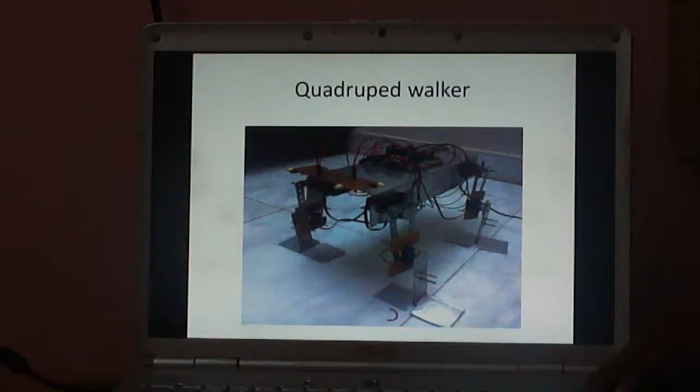So I learned from those basics and moved on to my own project: a quadruped walker. It has 4 legs, and each leg contains 2 servo motors.

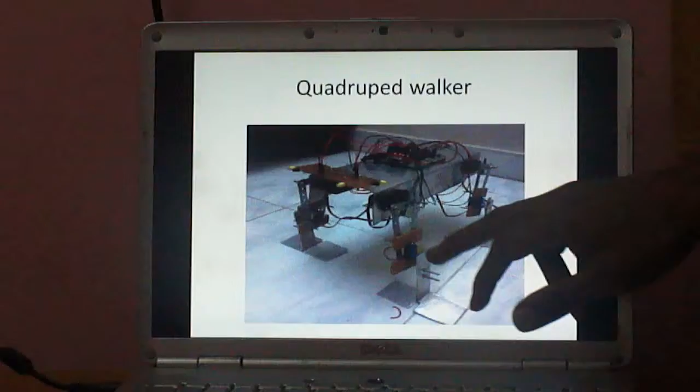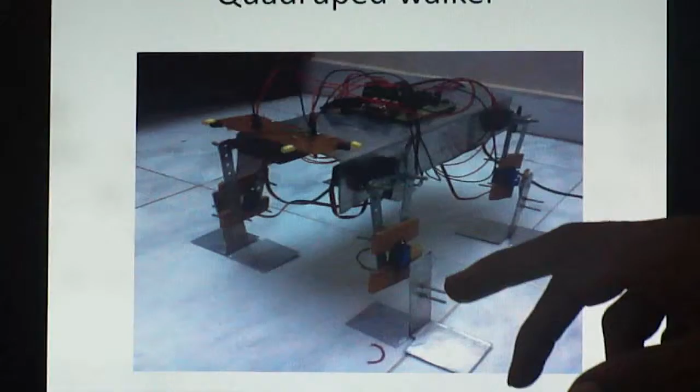One is high torque and another low torque, because the upper leg usually requires high torque to move and also to give power to the lower leg. The lower leg servo motor gets low torque, so that it can move the lower leg alone. So totally I used 8 servo motors.

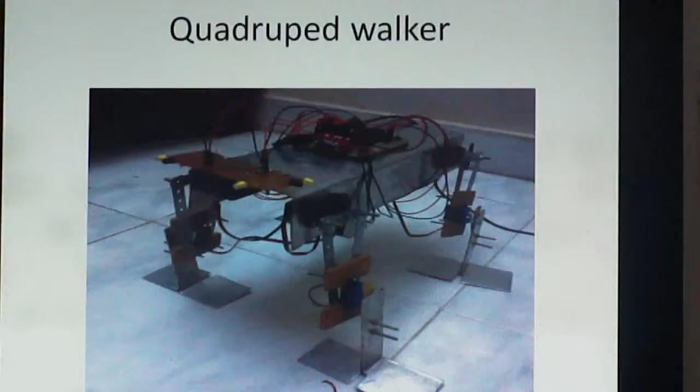Of those, 4 servo motors can hold up to 5 kg torque, and the low torque servo motors can hold up to 1.5 kg torque.

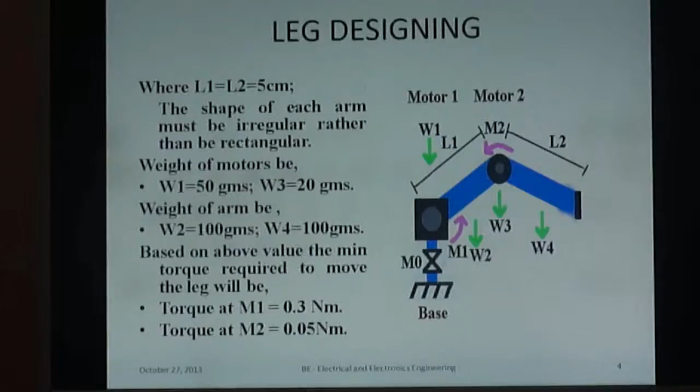Then this is my design. Before going to my design, my friend taught me a little knowledge about physics, statics and dynamics. With that knowledge, I designed my own leg for the robot.

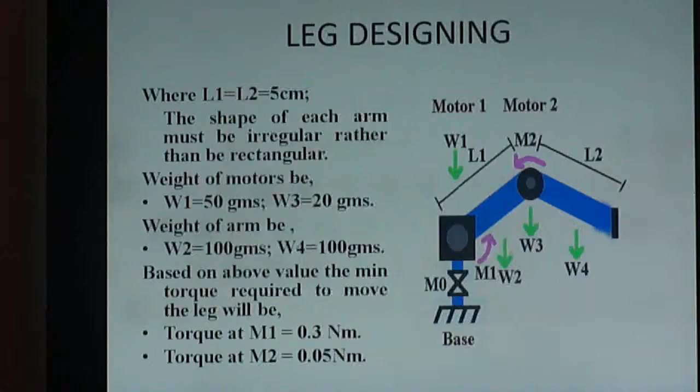These are the issues I gathered. Here L1 and L2 represent the leg lengths I chose, upper leg and lower leg, 5 cm each, equal arms like us. Considering the weight of the motors, with that calculation I chose motor M1 torque as 0.3 Nm and M2 as 0.05 Nm. 0.3 Nm is approximately equal to 3.5 to 4 kg torque.

When I was doing the quadruped walker project, I wasn't able to code it completely. I knew the concept, but I couldn't complete the project because at that time I didn't know about C programming, embedded systems, and microcontrollers. So it was a huge loss for me — I spent more than 5 to 6,000 but couldn't complete my project.

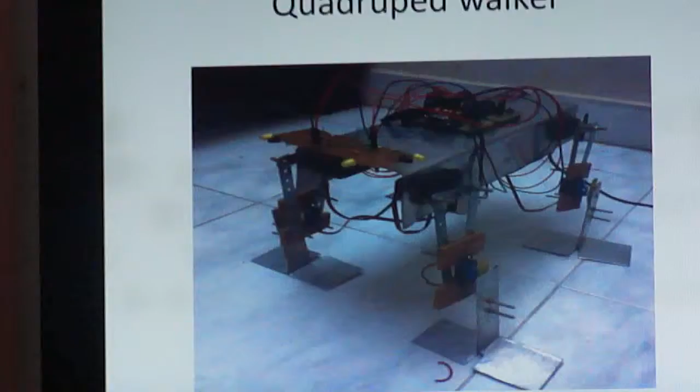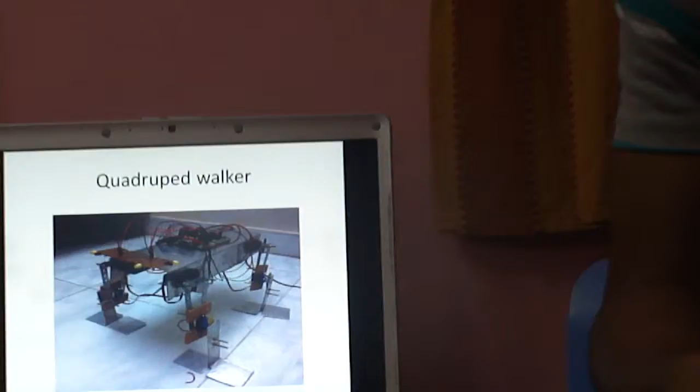But this mechanical part itself took more than 3 or 4 months to complete. In parallel, I was developing my code, but I had only 2 days left to finish the mechanical project and run it. Actually, running this properly takes at least a month or more, but at that time I didn't have that time, so I couldn't complete this project.

But now I know hardware-related issues since I was working at Celsius, an R&D department in embedded engineering. At that time I learned something about hardware-related problems when it comes to the real world, rather than simply working in code. During my final year project, I didn't know about simulation software and so on, but now I have some ideas. So now if I continue my project, I may be able to complete it.

And this is my small intro about me. Thank you.